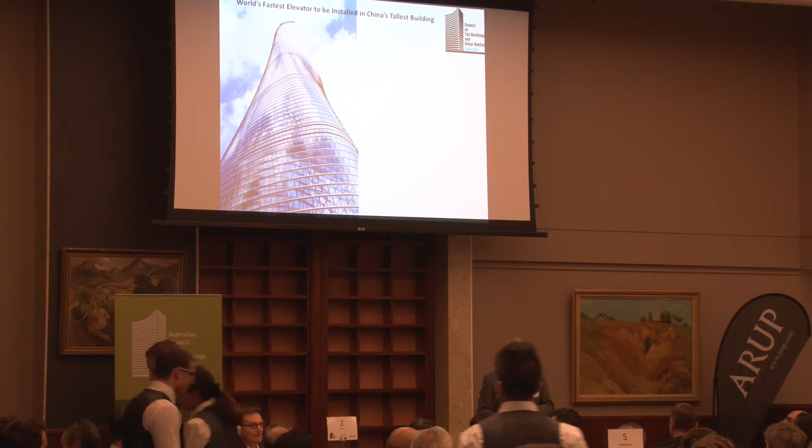They had to develop extra strong wires, they're saying here, and because of the speed and the amount of energy, it certainly generates a lot of power. So doing it as 2 lifts, they're more or less self-generating in power, the words are saying. To further increase the safety, elevators are equipped with multi-stage shock absorbers, emergency stop devices, speed governors and other safety devices. To get to that sort of speed and reduce the turbulence, it's actually got streamlining top and bottom, so it's like a little, I guess, rocket ship going up and down inside the capsule.

And it's also equipped with devices that reduce the air pressure in the car, so you don't get that feeling of discomfort like when you take off in an aircraft. But we'll see how that actually works. So the building is 632 metres tall, or 119 stories, 53 seconds from the bottom to the top and stopped again.

And if you go online and Google elevator speeds, there's a great little diagram of all the world's tallest buildings in real time, and it has a race between the elevators, and it's really interesting to see how fast this one is compared to everybody else. So it's worth having a look at.

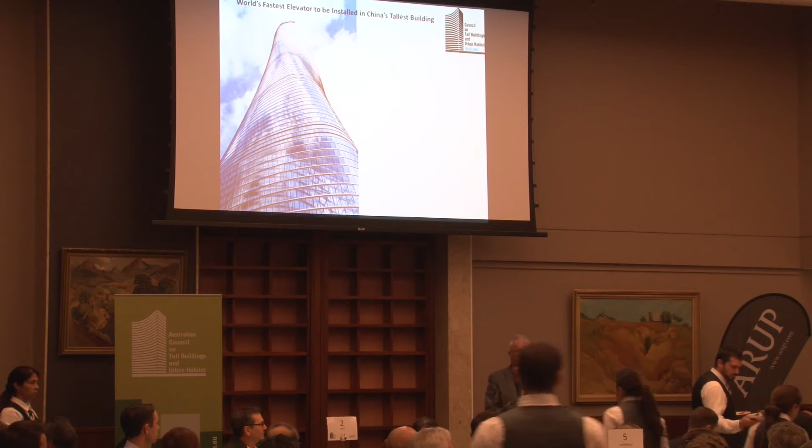So we have 2 speakers presenting first up this morning. The first person is going to be Caroline Stalker, Director from Architectus. Caroline is a highly regarded designer, communicator and leader of teams for complex architectural and urban master planning projects. Her career spans 27 years and has involved a range of projects around the globe. She demonstrates a sustained passion for enhancing people's connection to the natural world and each other through design. This has been recognised over many years through numerous architectural and planning awards and government advisory roles.

Caroline has recently been designing breathable and green integrated tower developments and is a member of the Council of Tall Buildings and Urban Habitat Design Committee. She's also an adjunct professor of the School of Design and Creative Industries at Queensland University of Technology. Caroline has served and chaired many juries in both architectural and urban design awards. Oops, I've said that before.

Caroline's presentation today is based on a presentation she did last year at the Council of Tall Buildings and Urban Habitat Conference in New York. So I'm looking forward to seeing her. I didn't get to go over last year.

And just to save time, I'll do Elizabeth's introduction as well now so we can roll through the presentations. Elizabeth Watson-Brown is the Design Director at Architectus. Prior to being appointed Design Director of Architectus Brisbane in 2011, Elizabeth Watson-Brown directed her own practice for 21 years. Highly regarded for exemplar place response and socially responsible design, Elizabeth has been in receipt of many major architectural awards.

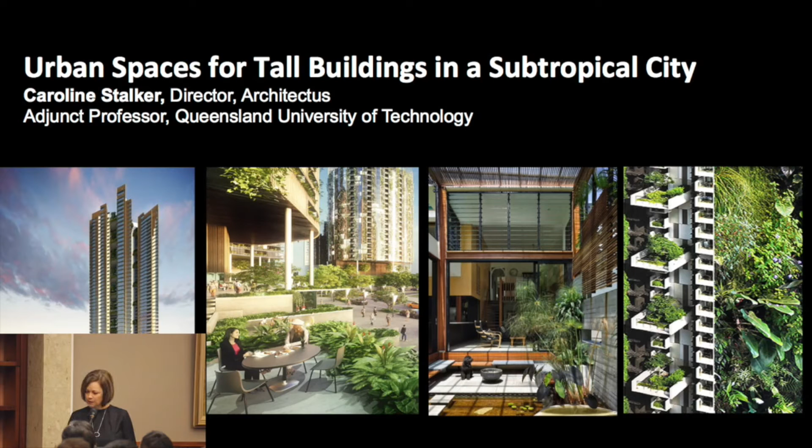So this work really comes out of an interest in engaging with this subtropical condition both locally and internationally. Many of the world's fastest growing cities are located in subtropical climatic zones in India, Vietnam, Africa, Latin America, Thailand and southern China. And as pressure to urbanise rapidly within these very condensed geographic areas is driving the creation of a very dense urban form, there's very intense pressure placed on natural systems and energy resources. The great thing about Brisbane is that we share this climate with these places, and we can be a kind of crucible for ideas and good practice for global urbanisation at higher density.

And the other great thing about Brisbane is that we have this climate and this place that actually has ideal preconditions for more sustainable development, in that the benign conditions of our environment mean we have the ability to create low energy buildings quite simply, and we have the ability to grow vegetation profusely very easily, and the right kind of rainfall and climatic conditions to create a greener urbanism and to bring green into our urbanism.

And these are, which is great, which means that we can really establish urban ecologies within our higher density environments, as well as essential nature connection. However, we are overall generally still building 20th century cities for 21st century circumstances. And if we look at the challenges of the 21st century and building cities in the 21st century, they are primarily around ecological sustainability and our huge population growth.

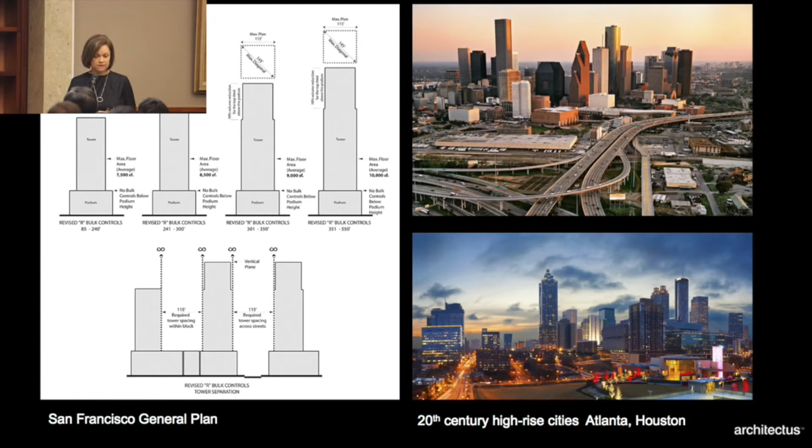And I won't talk about transport and cars and city forms, but I will talk about the fact that the podium and tower form remains the dominant solution for how we're doing high density cities around the world. It's been really interesting to be engaged with the Council of Tall Buildings and Urban Habitat over the last couple of years, because this podium and tower form is quite clearly being challenged by architects and designers and developers who want to see alternate models and more sustainable models for a more vertical urbanism around the world.

Interestingly, we may also have similar opportunities here in Brisbane. And for a city of its size, we're experiencing something of a high-rise boom. If you put it in the broader context over 20 years, maybe not this very year, but with 50 new high-rise projects projected for the city centre over the next 20 years by Brisbane City Council. The transformative impacts of these 50 towers could be enormous, and we actually mapped 50 hypothetical sites, demonstrating that in 20 years our city centre could be radically different as a consequence.

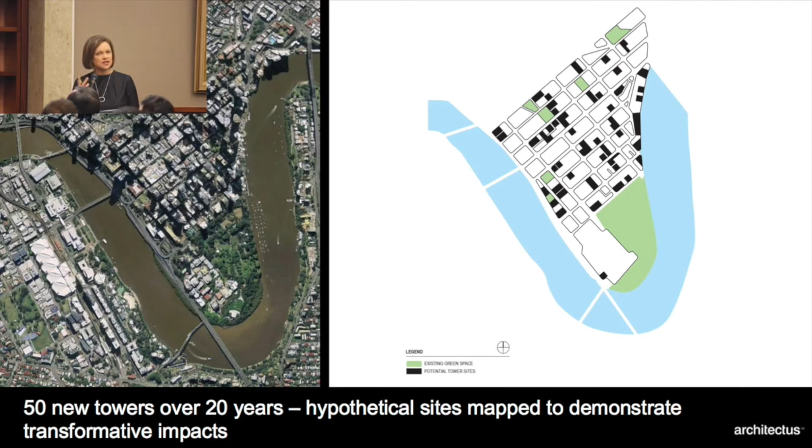There is immense opportunity inherent in this 20-year project to recast Brisbane as a city who maximises her natural climatic advantages by making a porous, green urban mesh of rooms, people, places and spaces offering landscaped respite, ecological connection and interaction, fully embracing our lovely subtropical setting. And that's really what I'm going to be talking about today, and the kinds of changes in thinking that we need to embrace to deliver that.

When the Centre for Subtropical Design was established, it undertook a really interesting community survey around southeast Queensland, asking people what are their key environmental values about living in southeast Queensland. And the two words that kept coming up again and again were openness and a relationship to landscape. That's what people love about living here. And this is what you could actually articulate as the subtropical experience.

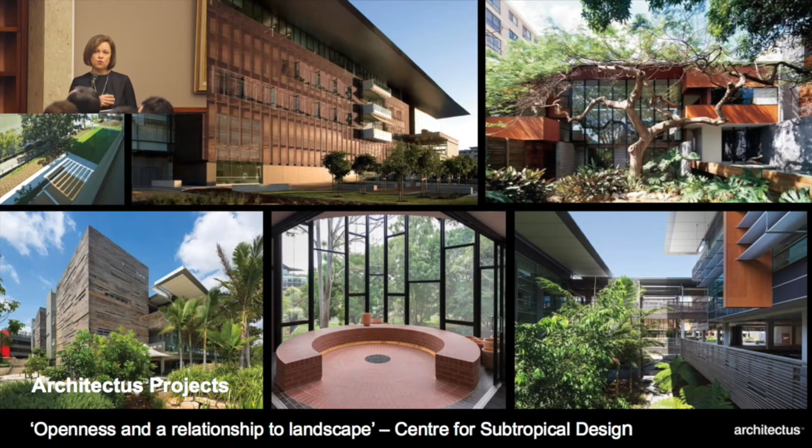And this idea of a clear openness and relationship to landscape has been a touchstone in the practice's projects for as long as I've been associated with the practice, which is 12 years. And we constantly look at ways that we can deliver that through all kinds of different project types. And I guess if you think back to where that familiar experience comes from, I don't want to get too romantic about the Queenslander because it's not perfect, but it does have some essential qualities that have really been starting to inform our thinking about the subtropical experience.

David Malouf, in his beautiful book 12 Edmondstone Street, described Queenslanders as airy, open, often with no doors between the rooms. They are on such easy terms with breezes, with the thick foliage they break into at window level, with the lives of possums and flying foxes, that living in them, barefoot for the most part, is like living in a reorganised rainforest. And that's the thing that we love about these buildings. That's not necessarily the way they look, but the experience of being in them.

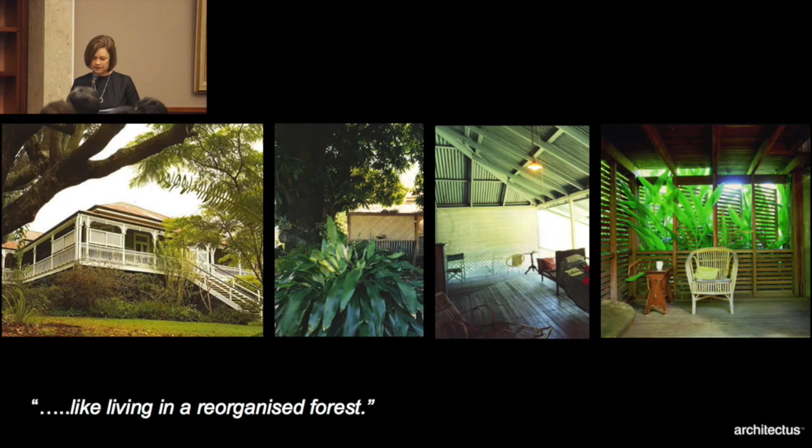They offer that capacity to moderate and fine-tune our relationship to the outside, but also give us that nature connection, and there's been so much research that demonstrates how beneficial that is to human well-being. And I guess really then can we think about how we could imagine or reinvest some of these qualities in the city centre? And certainly that's what Brisbane City Council has been talking about doing over the last few years.

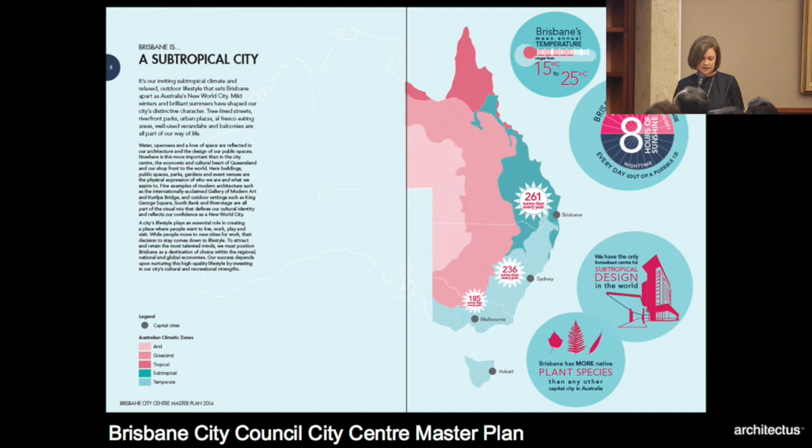And the city centre master plan has very clearly expressed the desire to reinvest attributes of the subtropical vernacular and the subtropical experience in our high-rise buildings within the city centre. And it really foreshadows this transformation of the city over the next 20 years, highlighting the need for a well-designed subtropical city.

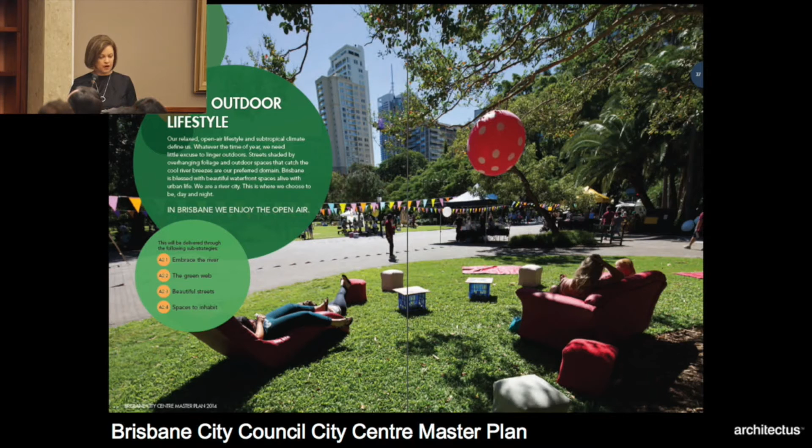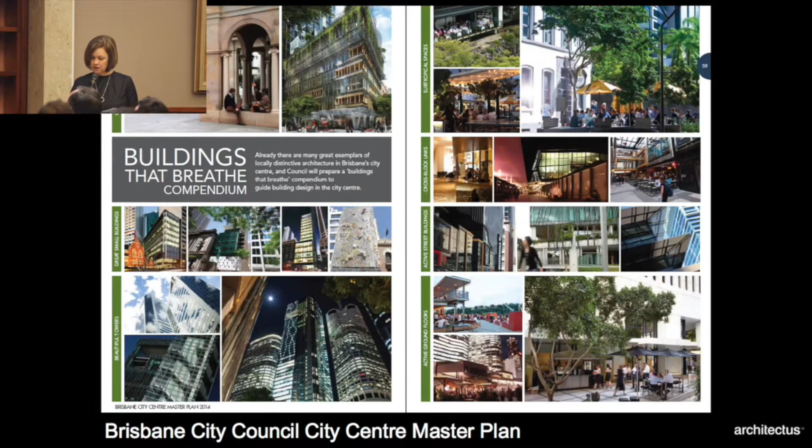It talks about ideas of leafy outdoor lifestyle for our public spaces, and importantly, the notion of buildings that breathe. And there's been some great work done on this compendium of buildings that breathe. And applying these concepts to tall buildings in Brisbane clearly has some work to be done to it, and we're looking for how this is going to play out.

I understand that the draft design guide is being finalised. It may have moved forward since then, and exemplar projects are certainly on the drawing board. But what we're seeing is the early translation of these concepts, as shown in these figures. The podium is articulated to create an urban veranda zone with recesses for gardens and shaded edges. But I'd like to point out that the fundamental form is still a podium aligning the street edge.

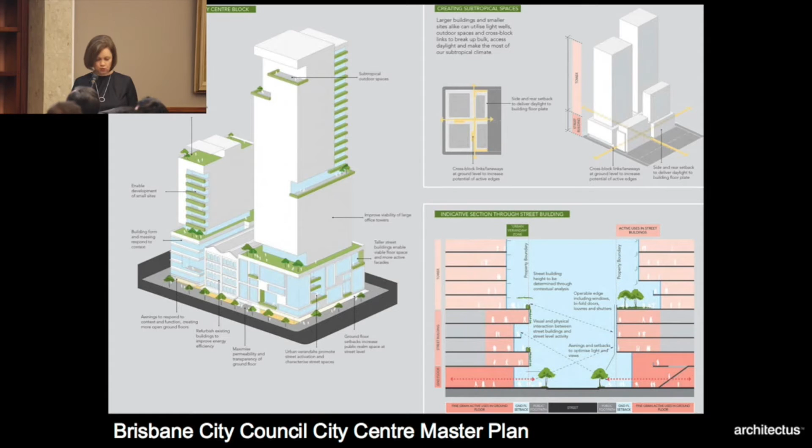And I believe that there's a fundamental issue with the adoption of the podium as a solution for moving forward. Podiums have been important devices for city planners throughout the 20th century to achieve street scale and active edges. But as we move into the 21st century with our ecological challenges, we really need to think differently about these.

In Brisbane, we have a particular condition where we have quite narrow streets. We have 21 metres between property boundaries, and that 21 metres is jam-packed with services, buses, cars, pedestrians, awnings, driveways and signage, limiting options for generous planting and water-sensitive urban design. When our city was rebuilt in the 80s and 90s, it was based on podium towers, podiums lining the street edge. And all of the activities of the public realm really crammed into this 21-metre zone between the buildings.

We do have within the city centre some generous public spaces of respite in our botanical gardens, River's Edge and Post Office Square, and they are heavily used. However, the public experience of the heart of the city centre is largely defined by these podia aligning the grid, with the public realm as the leftover spaces between.

And the enclosure of the podia at the perimeter means that these deep plan spaces can be very energy hungry as well. Our streets and buildings in the city can become urban heat islands in the summer, with the centre of the city often being the hottest part of our metropolitan region. And in Brisbane, if you watch the behaviour of Brisbaneites in the summer, we seek shade and breezes when we're outside, or we just stay in the air conditioning.

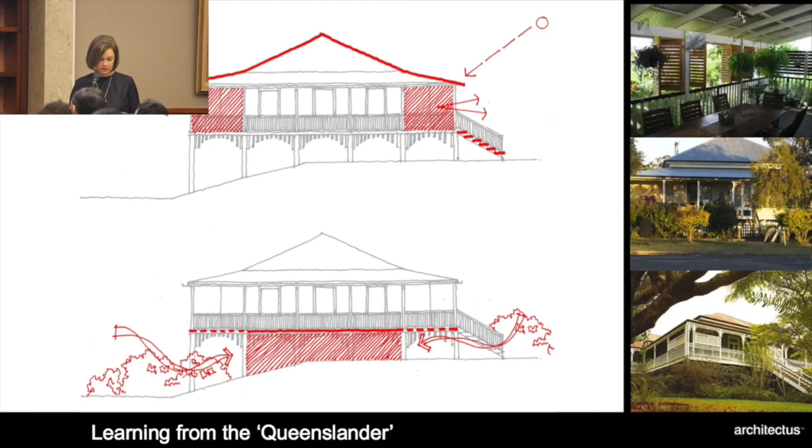and retreat spaces. And what I'm going to present now is 4 typologies or alternate typologies from podia that are around this notion of integrating subtropical experience and ecological function in the base of the building. And they're ideas that we've been trying out on projects over the years. First of all, the stepped garden terrace.

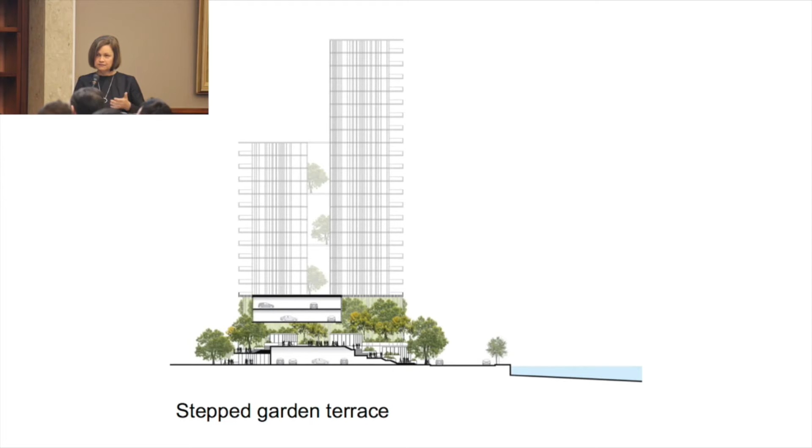The notion that a garden terrace can be created at the base of a building that can be accommodated by splitting of car parking to accommodate deep planting zones on the street, but also folding the green up onto the first level of the city is something that we've explored in a number of different projects.

In this project in the north of the city, we were really looking at the idea of creating an elevated platform that captured breezes and faced the right direction for some winter sun, but then also made a breezy entrance to the commercial uses and residential buildings above. And so that was that idea very much of a porous ground plane folding up and being able to accommodate.

Importantly, this would be an activated space, not a passive space. So there'd be retail on the street level, but also retail cascading down this terrace. And that was a first typology we've been exploring. The second typology is the notion of an urban undercroft.

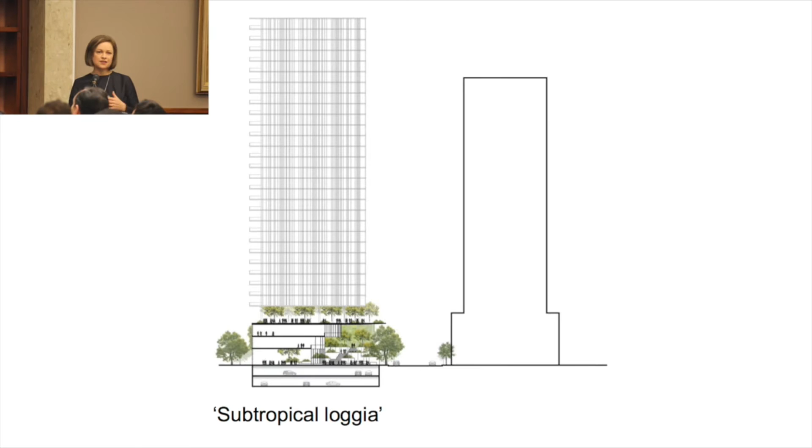Open undercroft spaces in tall buildings can provide ideal subtropical retreat spaces, offering deep shade, allowing breezes to flow through, deep planting zones around the edge, and spaces for water gardens. And exploring this typology, you can look at changing levels to create privacy. Again, you can activate this more open garden space with pods and really achieve that cool retreat within the undercroft of the tower and within an urban plaza.

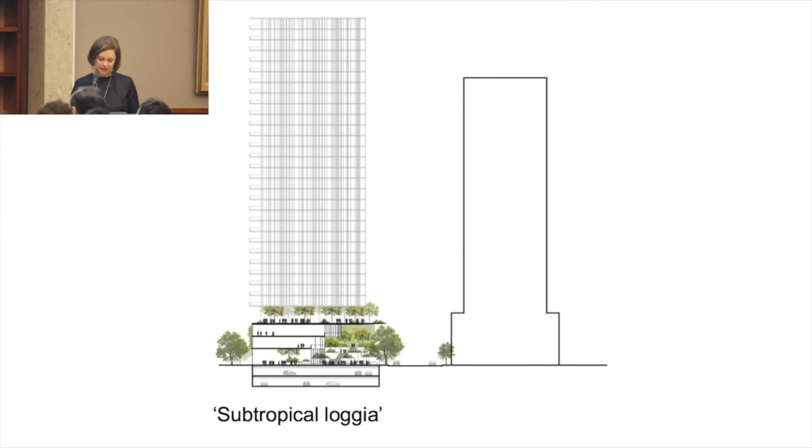The subtropical loggia was another typology that we looked at, and a loggia is a well-known Mediterranean climatic adaptation, providing shelter from hot sun and winter rains. Profound improvements to the ground plane of the experience of the city could be made with deep shaded edges, occupied edges along the street. Subtropical loggias, calibrated to accommodate trees, screening, water gardens and microclimatic adjustments that enable people in the city to find places of shelter or places in the sun.

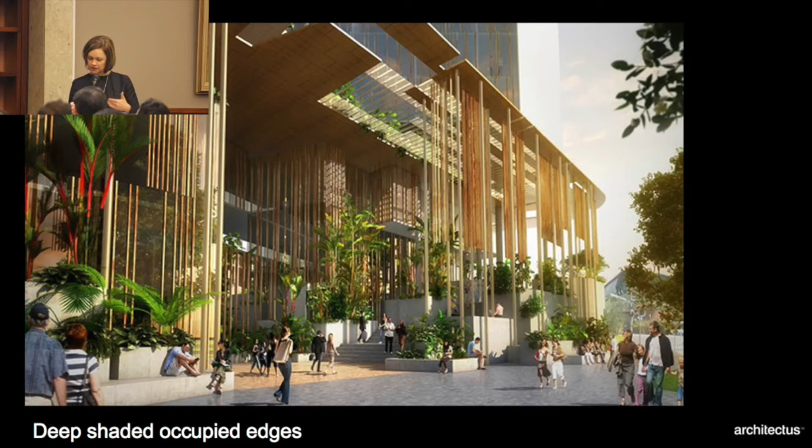And this project in the west of the city, which is a hotel and mixed-use project, enabled us to explore that idea of a subtropical loggia where the hospitality spaces could actually occupy this garden terrace, and again a fine screen to make those adjustments to your western or eastern frontage.

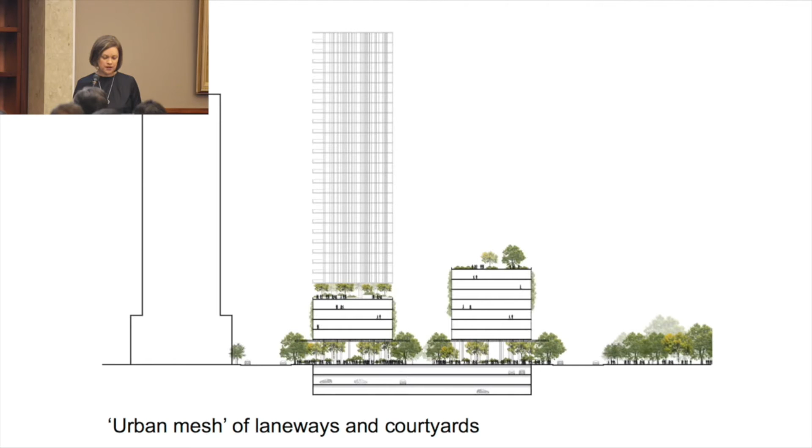And finally, the notion of an urban mesh of laneways and courtyards. So shady laneways combined with courtyards that catch winter sun could be woven into the ground plane as a mesh of subtropical spaces. A mixed-use project in the southeastern corner of the city provided the opportunity to look at a porous mesh of people spaces, both in plan and section, throughout the block: laneways, courtyards, podium gardens and sky gardens, providing a network of green, cool and open spaces throughout the entire site.

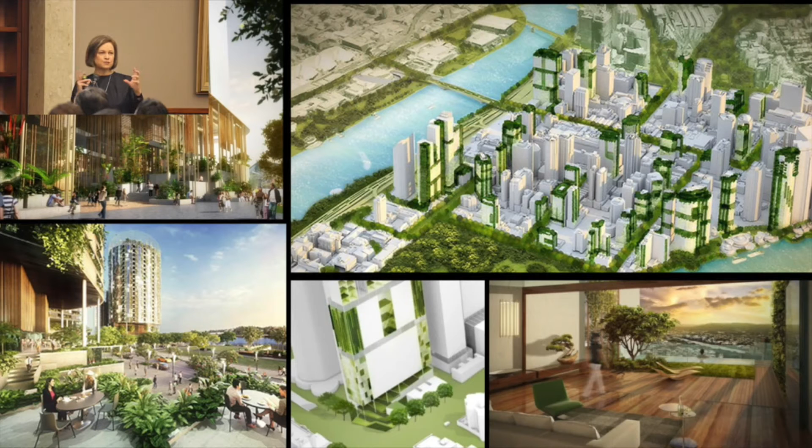So if you start to put those ideas in combination with the notion of breathable buildings and a different approach to the base of the building, you can really imagine quite a different sort of city over 20 years. It's a city that would be shaped by an urban experience of green streets, lively garden terraces, pleasant urban verandas, vibrant green undercrofts, subtropical loggias and green cool pools of air, all topped by green buildings that breathe.

This would really be a city to remember, to identify with, a subtropical city of the ecological age. And through the reconceptualisation of the base and ground plane of the 50 towers over 20 years, this could really be the urban experience of Brisbane.

So we took that idea of the 4 different podia and said, well, we could actually apply those principles to different types of sites. So the urban undercroft, for example, might be a fantastic typology for the edge of parks, so you get that connection and flow through. The stepped garden terrace, for example, might be a fantastic typology for the river edge, so you get your feet out of the flood zone, but you get that lovely elevated veranda.

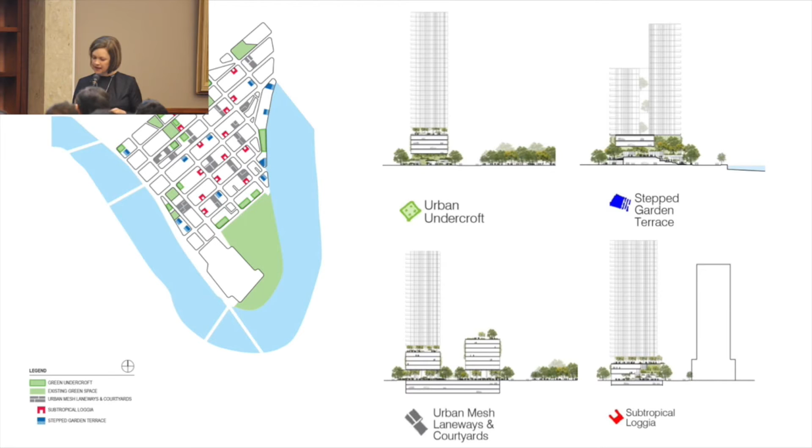The urban mesh laneways and courtyards might be a great typology, for instance, for deeper blocks, and the subtropical loggia could be a great typology for east and west orientated smaller sites within the city, so that you get that ability to screen those building-based spaces from the sun. And so that little diagram on the left shows how we hypothetically mapped where those different typologies could occur.

So to be really clear, it's not envisaged that the spaces in the bases of these buildings are publicly owned or managed. They are the spaces of the commerce of the city, the retail spaces, the dining terraces, the circulation spaces, foyer arrival spaces, all the spaces at the base of a building that have commercial value. The difference is they're conceived as being open, not enclosed, inviting patronage, and that is the great luxury that we have in this climate, to make spaces like that and to bring a habitat into those spaces.

Flexibility in thinking is important. The insistence that a street must be made up of a line of glazing along the property boundary is an idea that has its foundation, I would argue, in 20th century urbanism. But in the ecological age, activation can be provided in the way that retail is integrated into gardens, in the way people move through spaces, in how they're lit and managed. It doesn't necessarily have to be through that simple architectural solution.

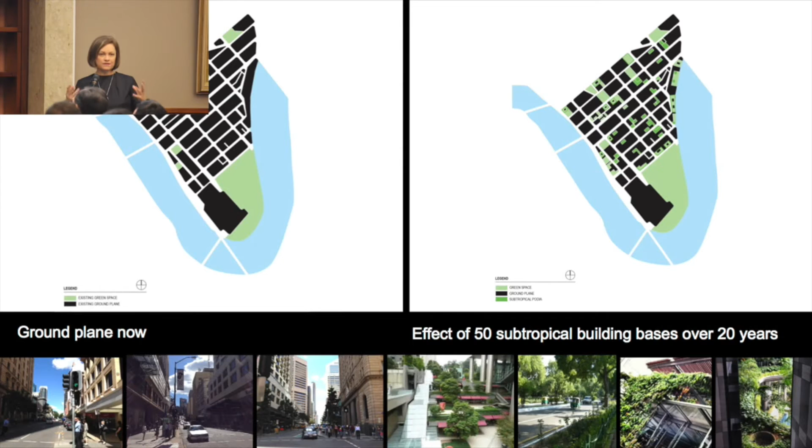I guess, pulling all of this together shows that we clearly think that urban and public spaces need to be the particular focus of big ideas about making a subtropical city. This is the part of tall buildings that most people experience, where the really big urban impacts are felt. There are huge opportunities presented by our very benign climatic conditions to create these new models and typologies. Moving towards such an aspiration really requires strong vision and practical measures to achieve it. In Brisbane, the vision is clearly articulated in the City Centre Master Plan.

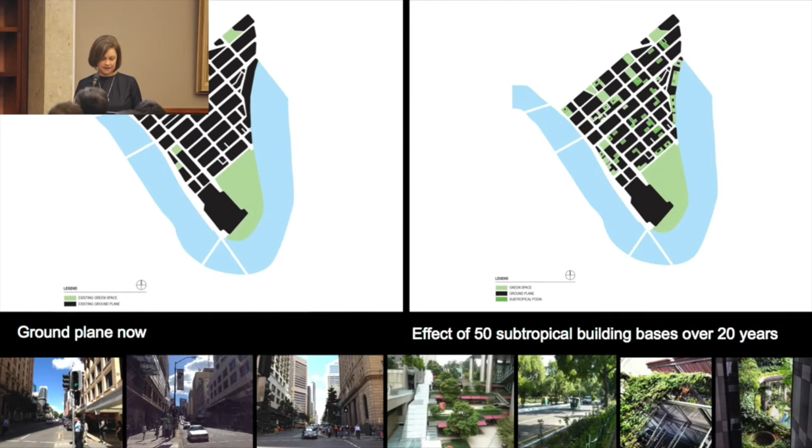The practical delivery of this will be through a partnership approach with progressive developers who understand the commercial returns in making places that people love to be. Successful places attract people, which is fantastic for long-term value and patronage. And so I'm really incredibly proud as a Director of Architectus to be able to introduce this project, which is an absolutely extraordinary exemplar of the kinds of principles that we've been talking about and thinking about, and potentially Brisbane's first breathable building. So I'd like to invite Elizabeth Watson-Brown to the stage to talk about this project.

Great, thanks so much, Caro. Can everyone hear me?

You've certainly set the scene, Caro, and explained the global context and the local context in which we sit, and our vision, I suppose, for what we like to call the new subtropical city, the new world subtropical city. And you can see, after listening to Caro, how interested we are in the urban habitat element of the CTBUH initiatives. But as Caro said, as we build our city for the ecological age, we can see great opportunity in Brisbane city centre, as Carolyn outlined, to open up the ground plane, to create shade and to allow the permeation of breezes, greenery and, importantly, people. Not just buildings that breathe, but in fact a city that breathes.

So in reference to the TB aspect of the CTBUH, I'm going to talk this morning about the proposed project at 443 Queen Street, which does sit in that wider context of the vision for the subtropical city, and in the broader context, as Caro explained, of great global possibilities and a future in the subtropical zone. And I won't dwell too much on this because Caro talked a little bit about this, but we certainly in our design always start with the best aspects of the subtropical city. And to do that, we do need a real understanding of the subtropical condition.

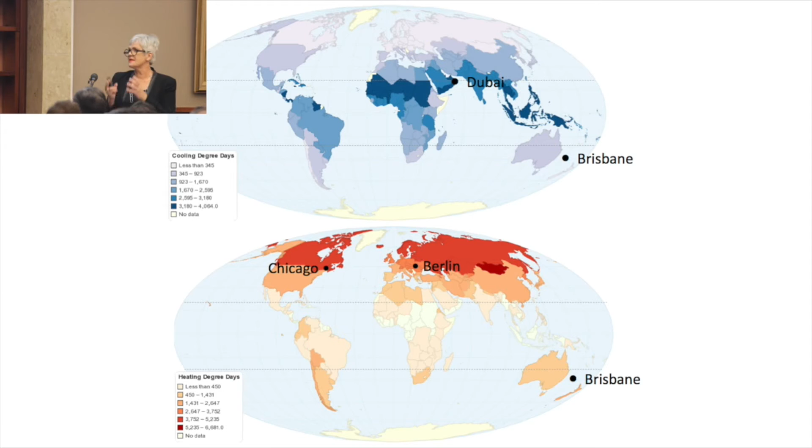So it's not just about individual buildings in our place, it's actually about the influence they might have in terms of the development of the planet. And in global terms, about 1/3 of people actually live in the cold to cool temperate zones. You can see that on the bottom map, and depend on heating in winter. 1/4 live in the hot, humid equatorial zone, and another quarter live in the hot, arid zones where cooling is desirable for a substantial part of the year.

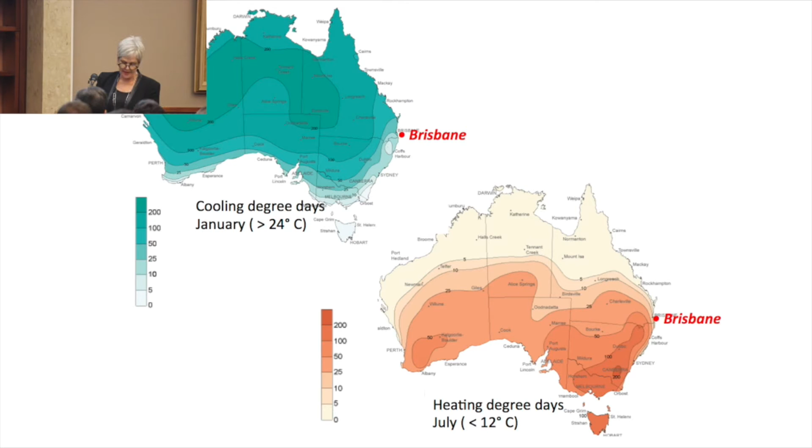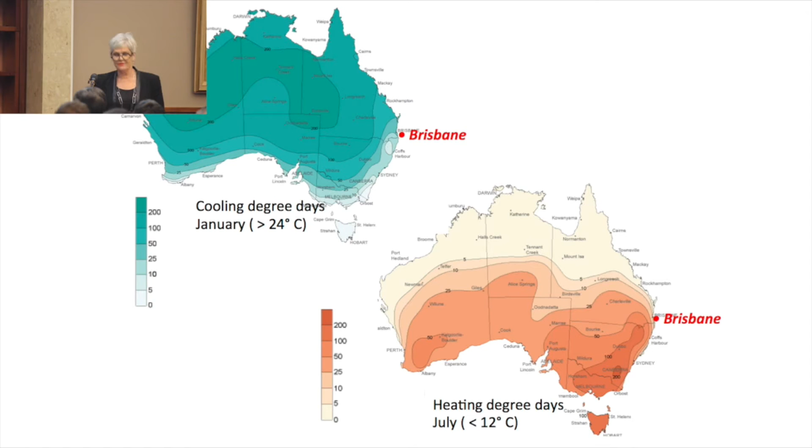But we, in Australia, our whole continent is located largely outside these extremes of temperature. So we've got a very, very particular and special condition here that we need to take advantage of. And we like to say that Brisbane's different. And looking in greater detail at Australia, the Bureau of Meteorology actually agrees with that. Sort of like Goldilocks porridge, we're not too hot, we're not too cold, we're just right. In time with climate change, Goldilocks might need to move a little bit further south, but for the moment she's quite happy and comfortable here.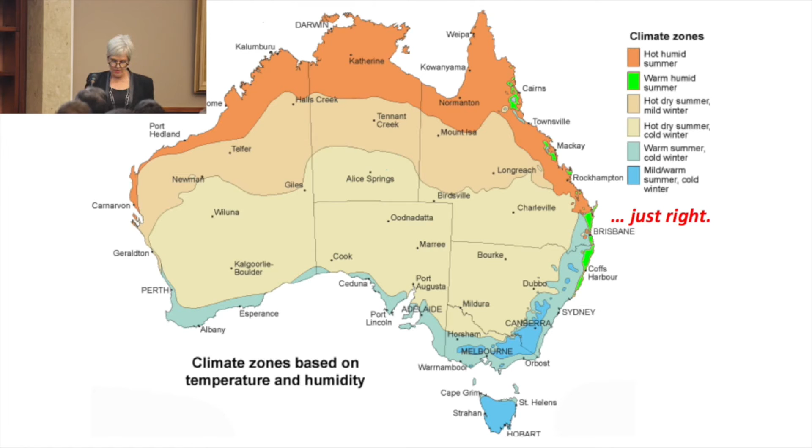So in the much finer grain analysis by BOM, it shows that our particular balance of temperature and humidity is localised to very sweet spots: the Australian mid-east coast and the highland areas of our tropical hinterland, and we're there in the centre of that sweet spot. So looking at the global scale, and Caroline spoke about this, we find the environmental conditions we enjoy are shared with east coast regions on 5 continents, which is very interesting. We're fortunate that 1/6 of the world's population also lives in this warm subtropical zone, and that's the place of many burgeoning cities and growth regions of Brazil, northeast India and southeast China, as Caroline mentions. So this provides the sort of larger context for how we think about our project in Brisbane.

So I'm going to be presenting the Queen Street project. I've framed this talk about the project around the structure of the Brisbane City Centre's important Buildings That Breathe initiative that Caroline spoke about. And we're certainly really happy that this advocacy of breathing architecture, which is the culmination of much thought and collective endeavour by a lot of individuals in this room over the years, it's very heartening to see it now embedded in policy, and this is a major step change and major positive move in terms of the future of the city. This is a great response to the context we've just described, and we believe, if properly interpreted, it could lead to a new generation of design for subtropical living, and certainly a new vision for Brisbane, as Caroline described so well.

So place is definitely the key to the way we think about architecture, and like many design professionals in this room, I've spent a lot of time thinking about Brisbane as a place, its landscape, its architecture and the way we live. And the way we think about designing in this space, Brisbane itself is the inspiration. So CBUS Property Development Manager Michelle Fitzgerald, who's here this morning, is an architect with a deep knowledge, experience and commitment to the architecture of this city.

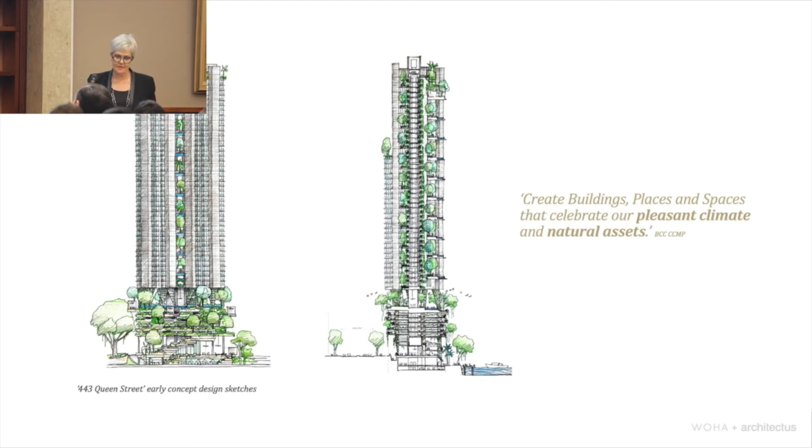So significantly elevating the parking, we could create that very generous public realm, the sort of area that Caroline was talking about. The resulting form actually generates a public realm, in this case, an area equal to 76% of the site area, which is very rare. The area of landscape space is close to twice that of the site area in the building, and the community spaces on the site are equal to nearly twice the area of the site.

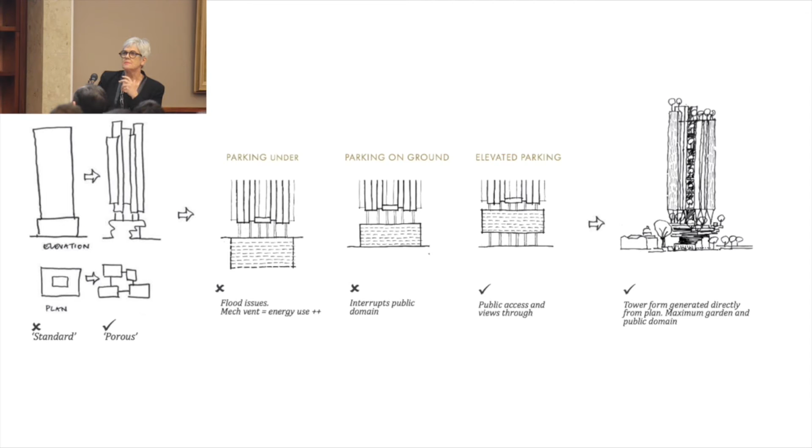So these are all really radical moves, we feel, but we do think it sets a kind of a benchmark for discussion about how you actually make generous subtropical spaces in our city.

Compared to a more compact plan form, an example of which is shown on the left of how you might approach doing a building on this particular site, we were able to pursue full natural cross-ventilation to every single apartment. Again, we think this is a really critical thing to try and achieve. It's not always an easy thing to achieve. It was certainly something right from this very early concept stage that we were very, very passionate about pursuing and achieving.

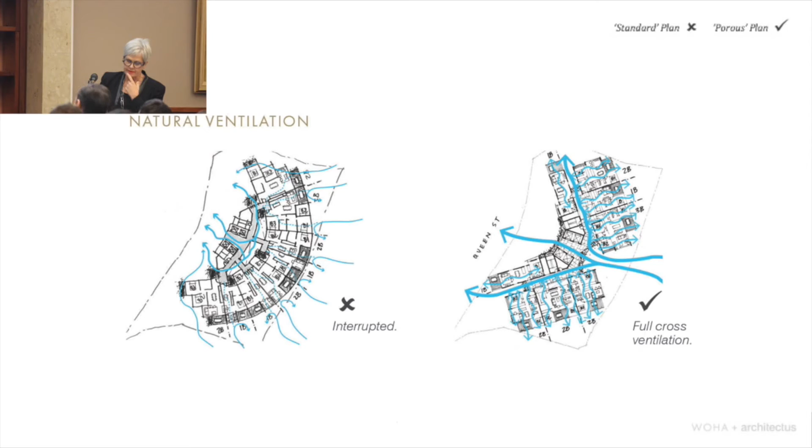By opening out the plans, and you can see the plan comparisons here between a more standard floor plate and a porous and open floor plate, we could also pursue a much wider and more dramatic arc of view from each apartment in this apartment building.

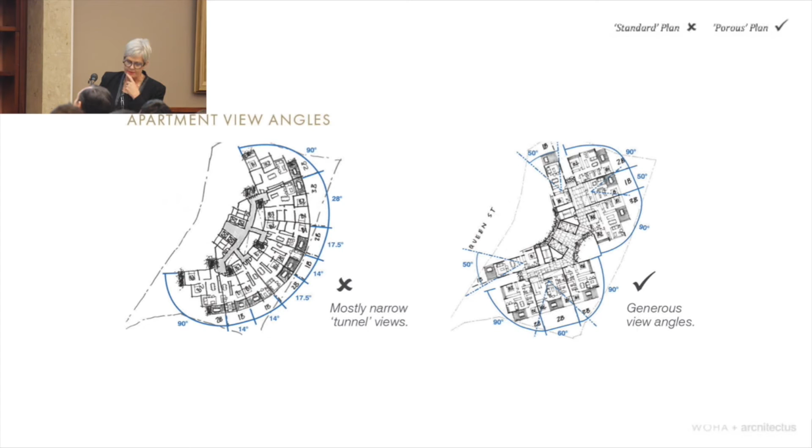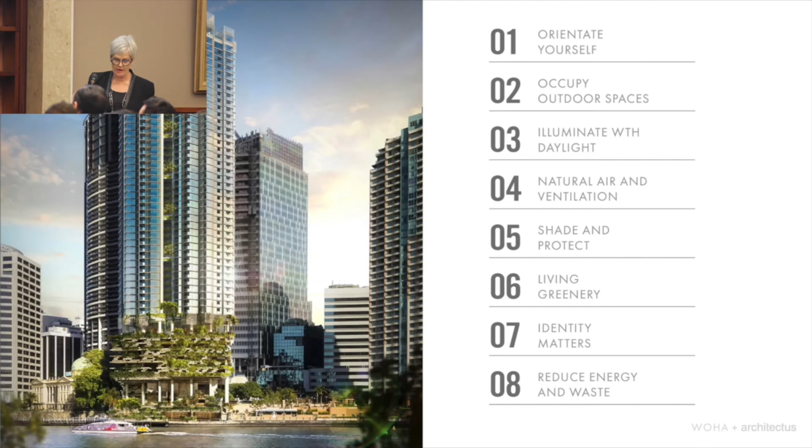So as I said, I'm going to explain the project in terms of each of the 8 buildings that breathe elements set out in the Brisbane City Centre Master Plan, not just because they're now formalised there, but because we actually hold them dear. They're principles at the very core of the design values of both Architectus and obviously WOHA. So orientate yourself. This is a marvellous site, obviously. The position of it is phenomenal.

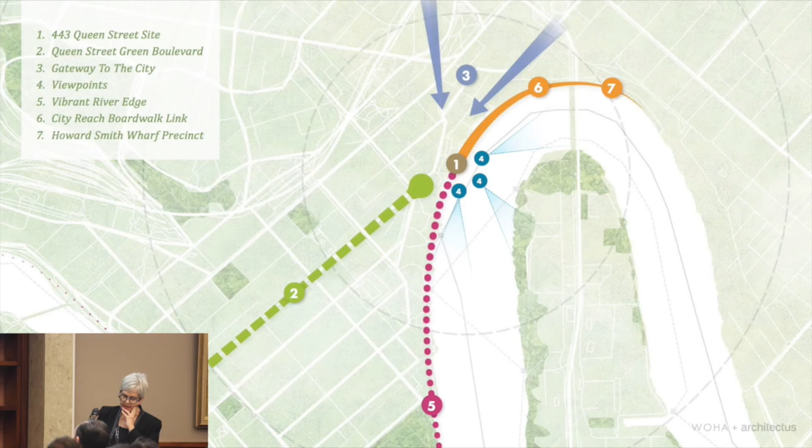So in the context of this project, we believe we've helped to orientate the building and its users and the public and the city on this remarkable site, and we believe that this has the potential also to orientate the city itself. It's on this key site on the banks of the Brisbane River with all sorts of amazing connections. It almost acts as a gateway, a landmark entry to the CBD from the valley, and it's a great vantage and connection point for the city.

It is an important location at the nexus of the city streets and the river edge, a vantage point, as I said, for some of the most powerful symbols of the city: the river, the Story Bridge, Customs House and its fig tree, Kangaroo Point cliffs. It is visible, potentially, connected, potentially, and open, potentially.

So the design that we've come up with is organised to clearly place us where we are at on that site, both physically, culturally and historically. And we think that this precinct links that earlier colonial city to the aspiring New World city of today.

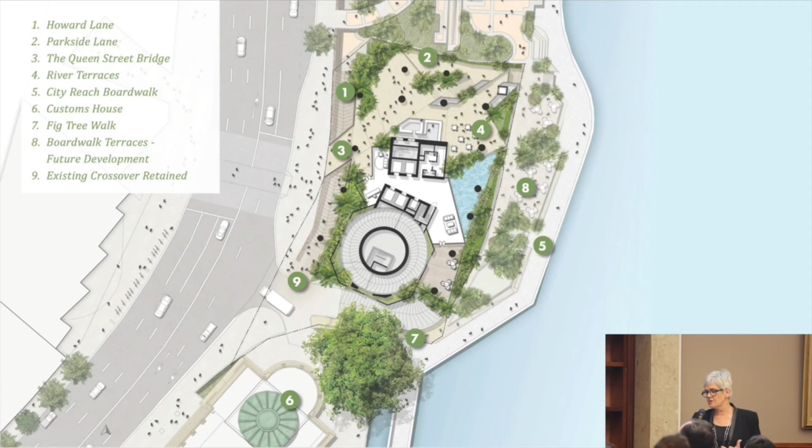An extremely tight entry lobby is the only sort of private space, if you like, and that's shown in white on that plan, the lobby and the core. And the rest of the space on that ground level and that Queen Street level is absolutely accessible public open space and garden space, placed as it is on that site to maximise the views to the river and to the Story Bridge and access from the city to the river. So we see this proposal as a link rather than a barrier between the city and the river.

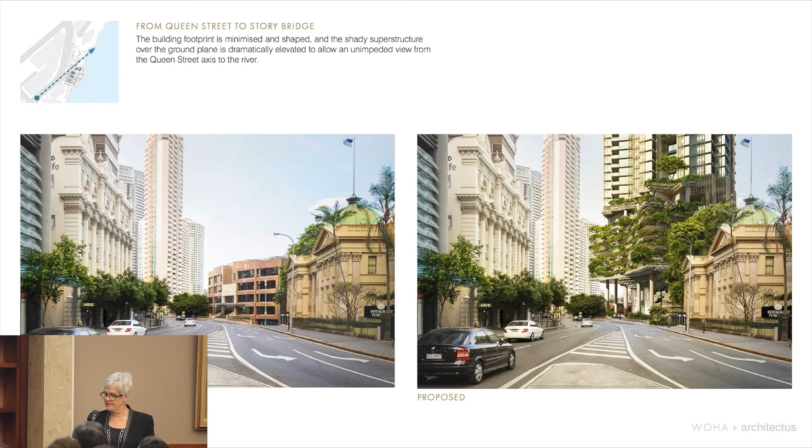And so just to illustrate that, we undertook a series of studies contrasting our project with the current impacts of the existing building on the site, the colonial building. And we certainly believe that this proposal offers a far more open, accessible and indeed orientating public realm than exists at present. So you can see existing conditions on the left and the proposal on the right from various vantage points, and these were critical vantage points as well in terms of the city centre master plan.

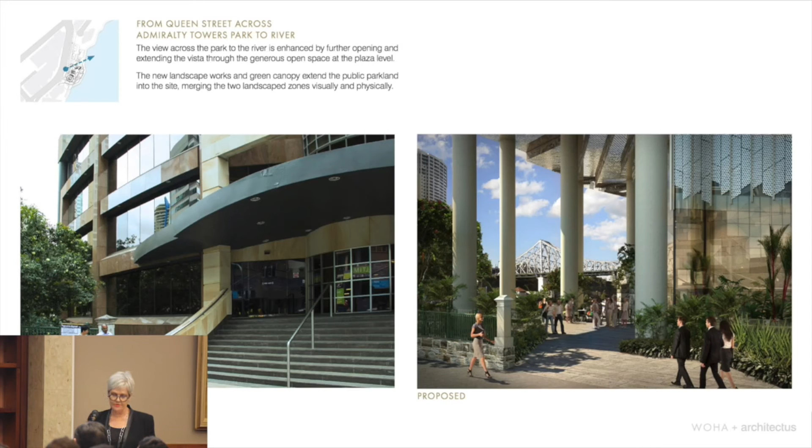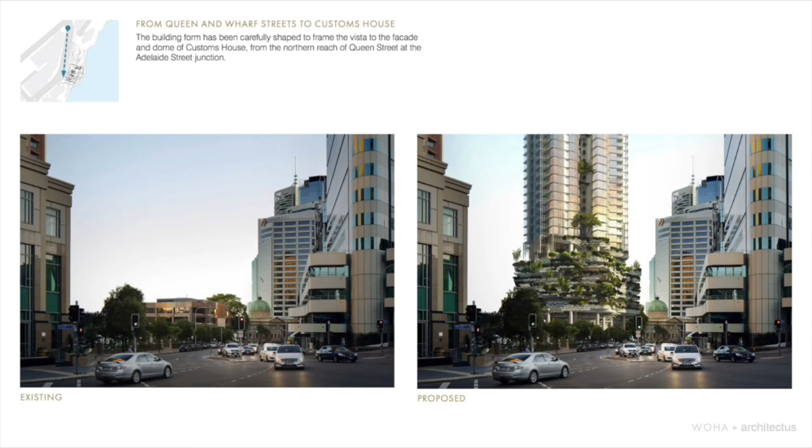So there's the footpath pedestrian experience existing on the left and the new building on the right, which is really not building at that level. We see it as parkland and public space with that transcendent view to the bridge there. View from across the road, down the Fig Tree Walk to the river. The view from the other end of Queen Street towards the site. Frontage onto Admiralty Towers Park and from Kangaroo Point.

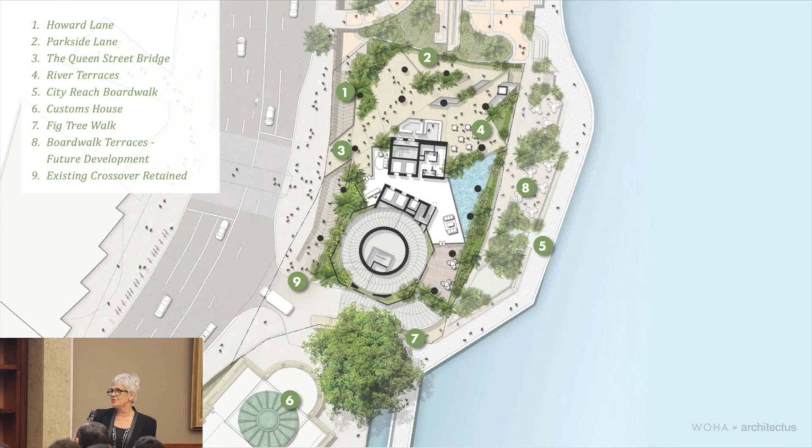So in terms of occupying outdoor spaces, again, that plan, with our ideal climatic conditions, we think this site offers the ideal opportunity to develop a really vibrant and generously connected public realm. A landscaped canopy hangs above an urban veranda, if you like, and Caroline explained the beneficence of that beautiful condition of living on a veranda somewhere, that condition somewhere between inside and outside, which is such a beautiful condition to enjoy in Queensland, and also that condition of under the house, that mysterious underworld, if you like, that's so shady and cool and breezy.

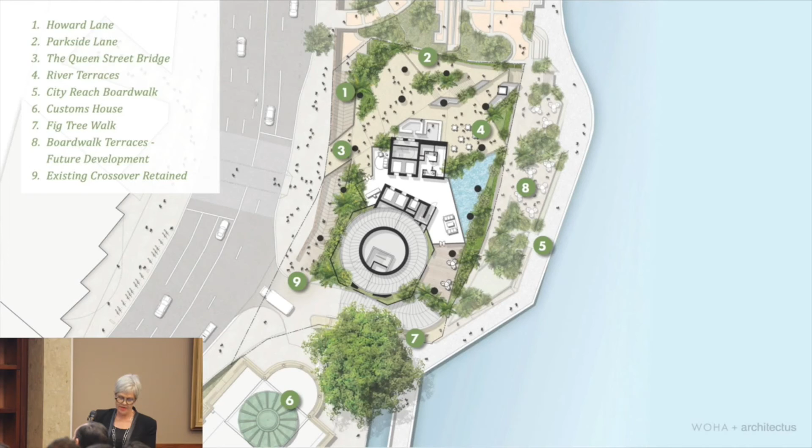So here you can see really generous new public walkways, gathering places, viewing places and active places, achieved by, as I said, minimising that footprint of the building at the Queen Street level and raising and shaping the superstructure to absolutely maximise those views and generate a lot of shade. We think the new development's going to vitalise that whole precinct by increasing the activity in Admiralty Towers Park and the Riverside Boardwalk, and Howard Lane beside the historic stone wall.

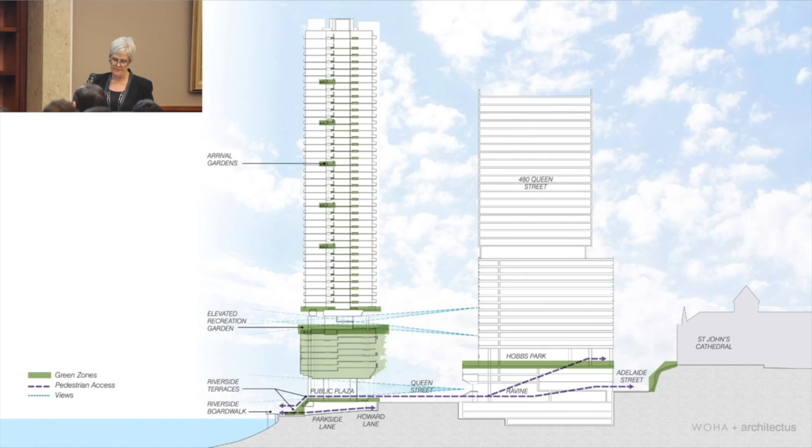We think it also sets up quite a strong relationship with the 480 Queen Street building opposite, completing that connection set up through that site from St John's Cathedral to the Riverside. So we think that it's all about actually being dignified and respectful in its context and opening up the city to the river. That's what we see as the purpose of this site and this development.

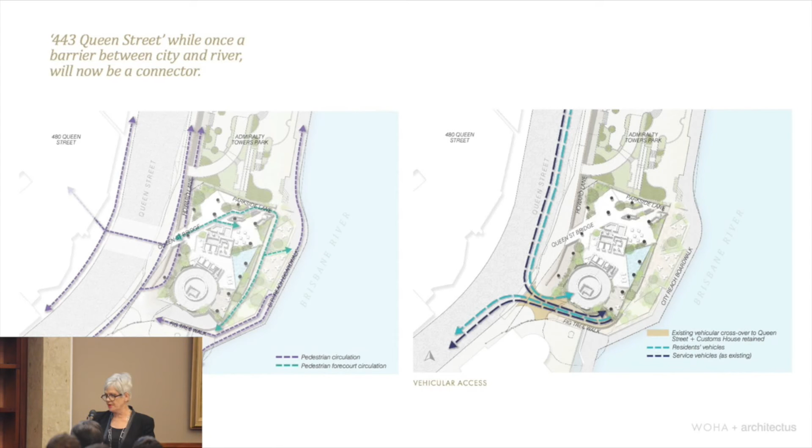Car access is absolutely restricted to the existing service lane and the crossover. This ensures absolutely minimal disturbance again to the streetscape, historic structures and the tree. And again, minimising the footprint of the vehicles liberates the remainder of the site for safe pedestrian usage and linkages to the park, boardwalk and the lane. So all of those principles that Caroline outlined, we're enacting here. And again, a quote from the Brisbane City Centre Master Plan in this precinct and this building, which is a tower in a plaza.

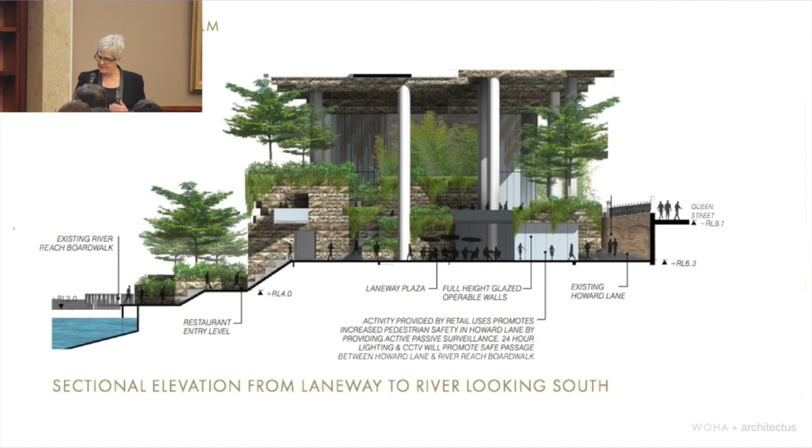In terms of activating the public realm, again, there will be a lot of public park space and cafes and restaurants fronting the boardwalk, positively activating that area, and cafes fronting onto the existing laneway, which is, at the moment, I think you'll all agree if you've ever been there, quite a scary and dead space. So we think, again, giving back to the public realm in terms of creating wonderful places to be, but activating it and creating the possibilities of great surveillance and connection as well.

The third element, illuminate with daylight. The porous plan you can see here, and response to the aspect, facilitates the permeation of natural light throughout and shading from the sun where needed. The tower is divided, as you can see on that plan there, into 4 main vertical clusters, joined only at the centre by the circulation linkways and gardens. This has proven a little bit of a challenge to Arup, but they've got it sorted now. Again, it's a non-standard building, isn't it?

You know, it's sort of, you haven't got the standard kind of very heavy floor plate. We've got this openness, and it's been a structural challenge, but very, very well solved by Arup. But really critical from the point of view of achieving, as you can see on that plan, every single apartment with access to light, air and amazing views. So that's what's generated the floor plan.

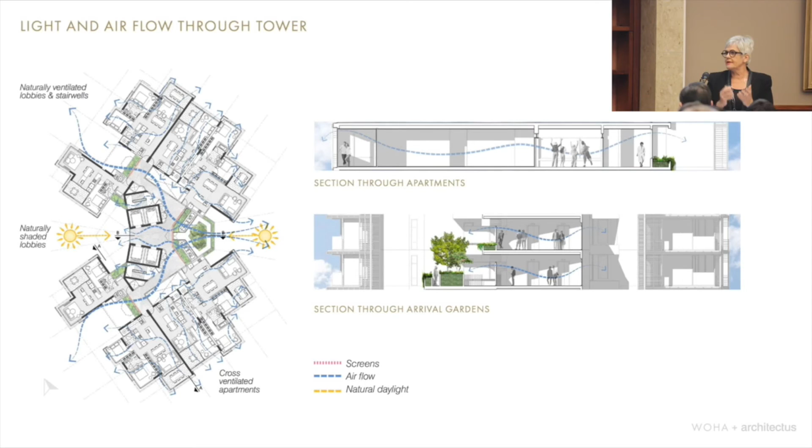And one of the things I really love about this, and it's a kind of an abstract notion, but for me it relates it back to the Queenslander, is the physical expression of the building, and the form is the direct expression of the way the plan operates and the way you occupy the building. So it's not about gratuitous and decorative shaping, and form making and strange colours and things. It's an absolutely direct expression of the function of the building, and that's what's interesting and great about it. And in my mind, that connects it back to the frugality and the honesty and modesty of the Queensland House.

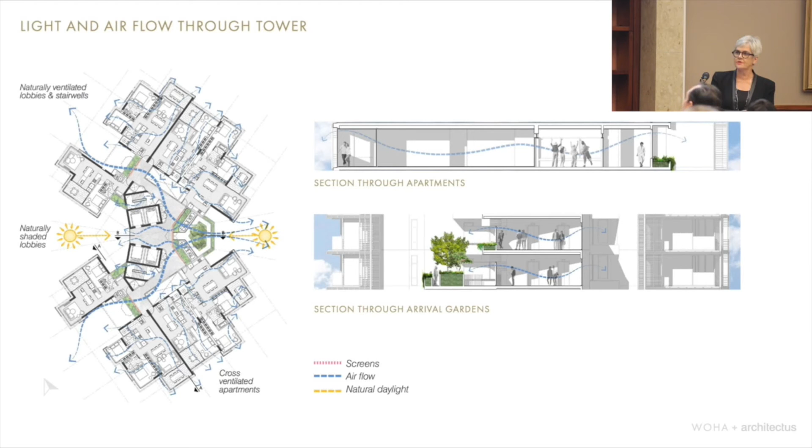So you can see there the images of the light and air flowing through, and then how that results in these remarkable living environments with these transcendent views to the river. And this remarkable luxury, and I was talking the other day to some consultant friends of ours and saying, this is what we think is the new luxury. Here, we think luxury is about access to this beautiful climate, about being able to open your windows and let the air flow through. It's not about gold taps.

It's not about marble. It's actually about giving everyone the opportunity, even if they're living in a dense urban environment in the centre of the city, to take advantage of and enjoy our beautiful climate and our beautiful vegetation. That to us is the new luxury. And that's what we think we should be pursuing in Brisbane, because we've got the opportunity to do it.

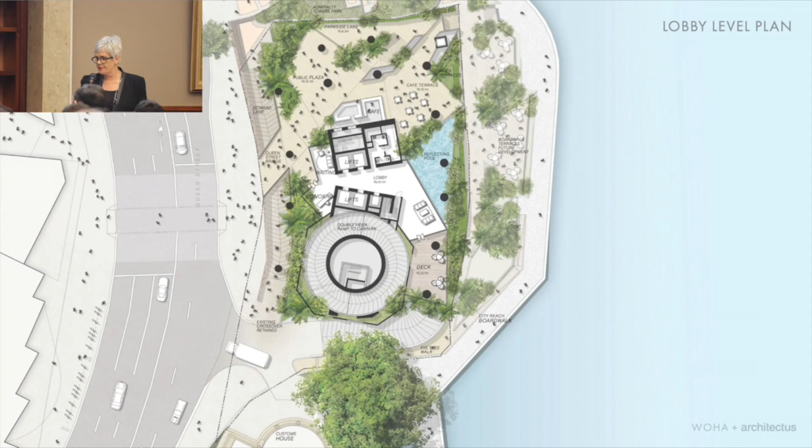Again, just talking about the fourth element, natural air and ventilation. I'm going to quickly run through the plans from the ground up to illustrate that, and that also illustrates the next couple of elements, shade and protection. Ground plan, again, obviously incredibly open, but also protected when necessary. The car park levels, radically elevated above the ground plane to create that beautiful canopy underneath. Again, totally naturally ventilated and daylit. The benefits of that are enormous, obviously.

You know, it seems nuts to us, the idea of digging a basement car park, particularly on this riverside site, throwing all those dollars into that hole, if you like, then having to mechanically light and ventilate that 24/7. That seemed like a ridiculous notion. So again, why not take advantage of these remarkable climatic conditions that we have, elevate the car park levels, and there are 6 levels of car park, and naturally light and ventilate them, thereby radically saving energy over time and make it a much more pleasant experience driving your car up there, parking, looking out at the river, seeing the planted gardens in front of you.

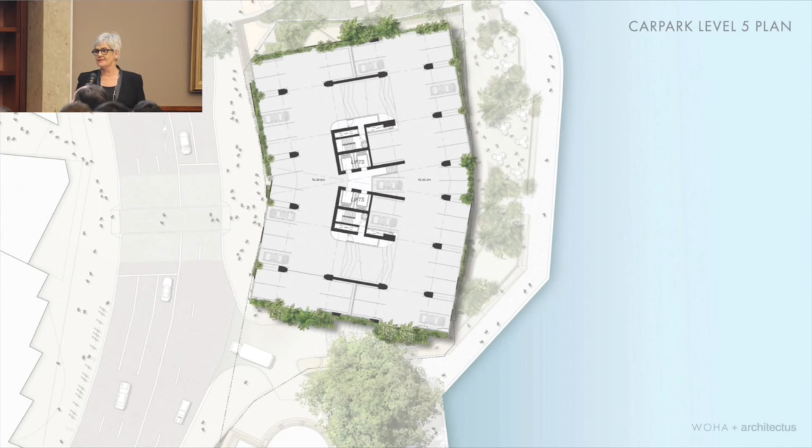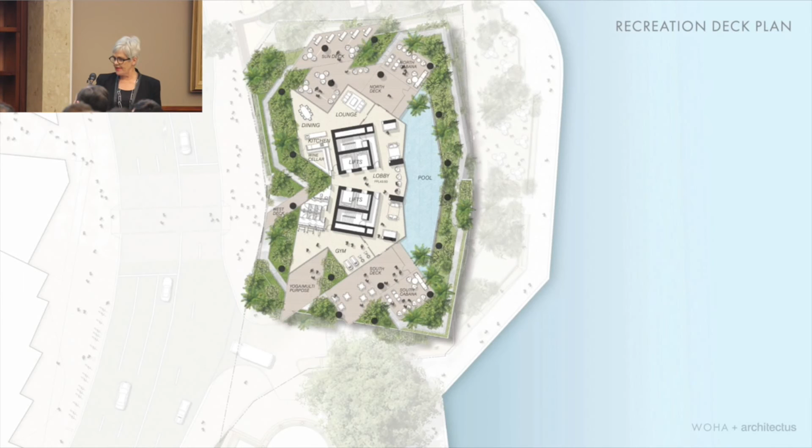So much nicer than burying yourself down in a sort of a shallow grave, with the risk of the river flowing into it, and we all know that that's happened, and people have lived through that. So that just seemed like a no-brainer again. On the lid of that subtropical hanging garden, if you like, is the recreation deck. It takes the form of these decks and pools. Again, all sorts of familiar things that we like inhabiting in Queensland, beautiful cabanas, the pool edges, but all in a very lush garden setting, but up there in the subtropical air.

And then up to the apartments themselves. So this is the first level of apartments, sort of a transfer level. So we needed a larger slab area there for the transfer purpose. So what we've done is planted that out with beautiful gardens as well.

So just imagine coming up in the lift into the arrival gardens there between those two lift cores, with these amazing views across greenery and past trees to the river on one side and down Queen Street to the city on the other, with natural breeze flowing around you. We think that's a pretty amazing experience. It's the kind of thing that we really enjoy, you know, living in Brisbane, and we think we can replicate that in the high-rise conditions.

So I've only got 5 left, so I'll move pretty quickly through these because these are pretty self-explanatory. Just when we get to a reasonably typical floor plan, though, you can see the advantage.

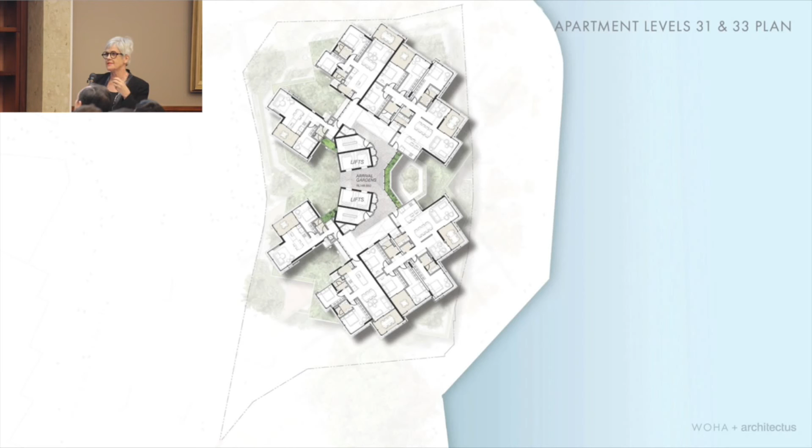And there are some amalgamated apartments on this one, but every single apartment has 2, 3 or 4 open sides, so you can open your windows. Natural cross ventilation flows through. It's probably pretty hard to read on these plans, but another great move is that each house in the sky has its own service balcony. So again, another aspect of luxury that isn't about gold taps and marble. It's about being able to hang your washing out and for it to be naturally dried.

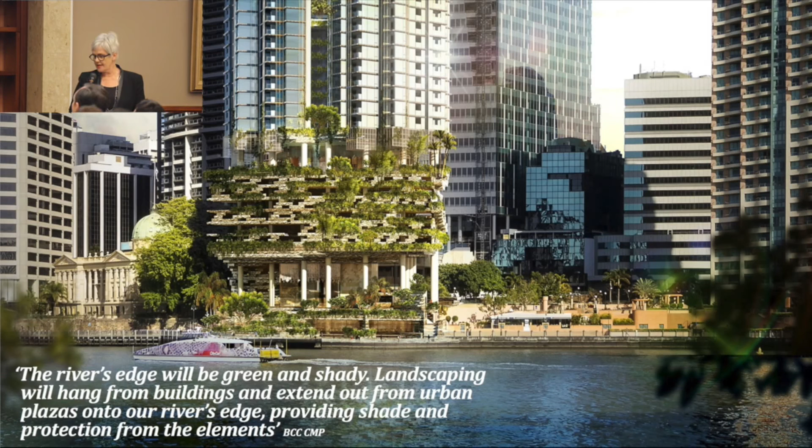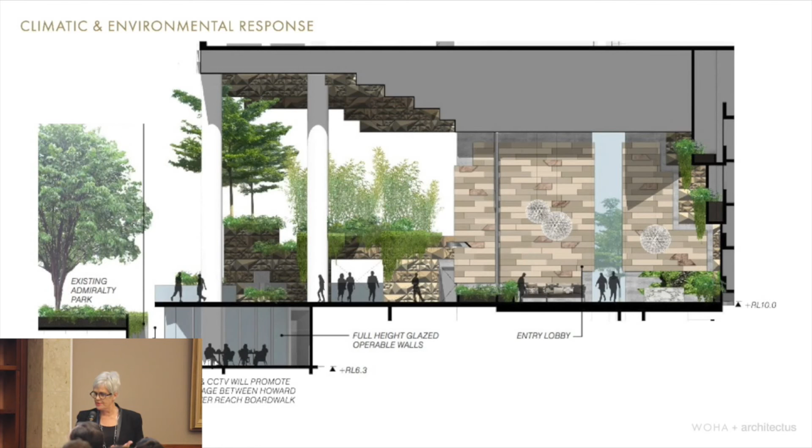So all of those things are the things that we think are great ways to live in Brisbane in beautiful housing, replicating it here to give people the opportunity to live in the subtropical air in the city in that way. So that's how we think of our building, again, taking that quote from the Brisbane City Centre Master Plan. Again, explaining the benignity of having that beautiful open public plaza at the ground level. Using screens tempered in different ways around the different faces of the building to provide shade and privacy throughout as well.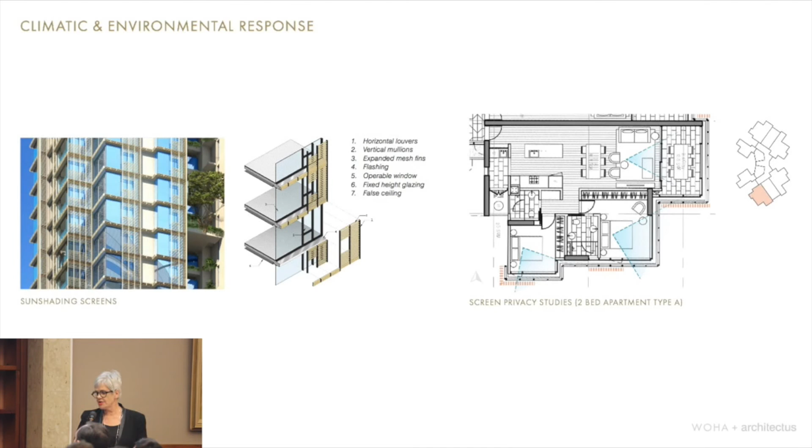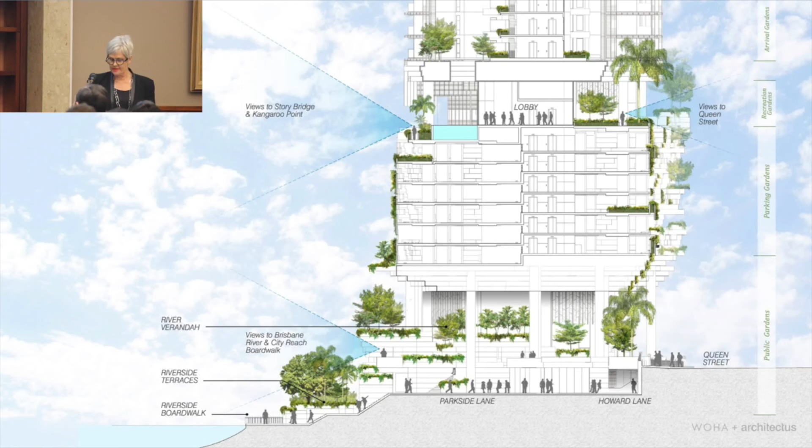Living greenery, again, we've spoken about it a lot, but we think landscape's not just an attractive feature, so it's not just an aesthetic thing. It's a dynamic, active component of a sustainable building. Planting obviously converts carbon dioxide to oxygen and sequesters carbon from the air. Plants cool the environment. They also provide food and shelter and habitat. So this is the UH dimension of the CTBUH. So humans inhabiting the city with wildlife as well, insects and animals within the city, increasing biodiversity and reducing the ecological footprint of the city.

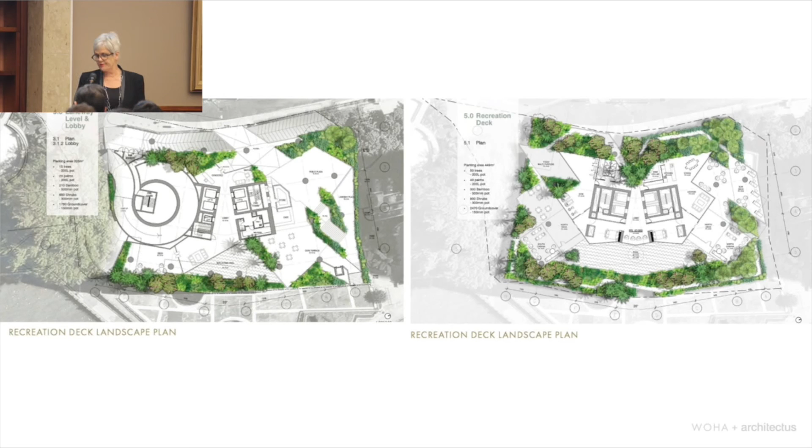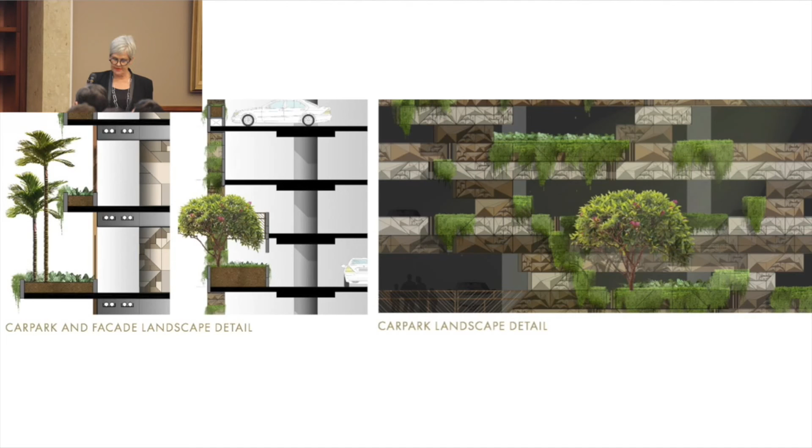And this particular project achieves a green plot ratio, that's the planted area divided by the site area, of nearly 200%. That's interesting when you compare it to the existing building on the site, with a 5% green plot ratio. And here you see some of TCL's landscape plans. And again, just some sections of how those planters actually work and the philosophy of the planter boxes and these elevated garden beds. They're all located in easily accessible common areas only, where they'll be seen, they'll be valued and regularly maintained. And all of this elevated planting is grown in very simple water-efficient planter boxes designed for easy access. Some images there of some of the details around the open lobbies and garden spaces, etc., and how we achieve views and wind protection where necessary in Brisbane.

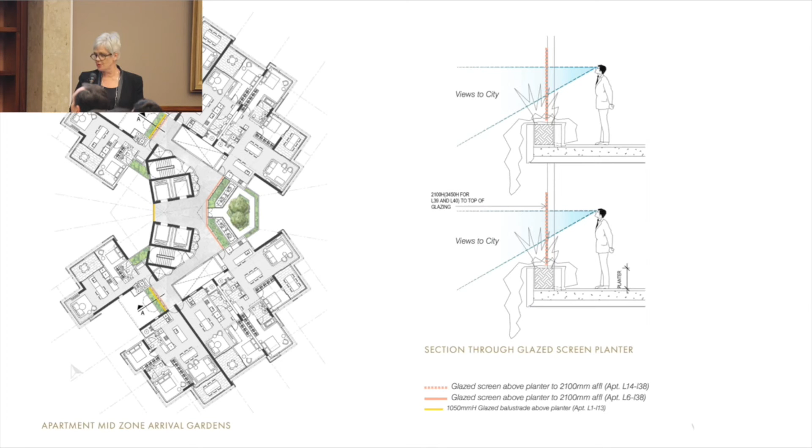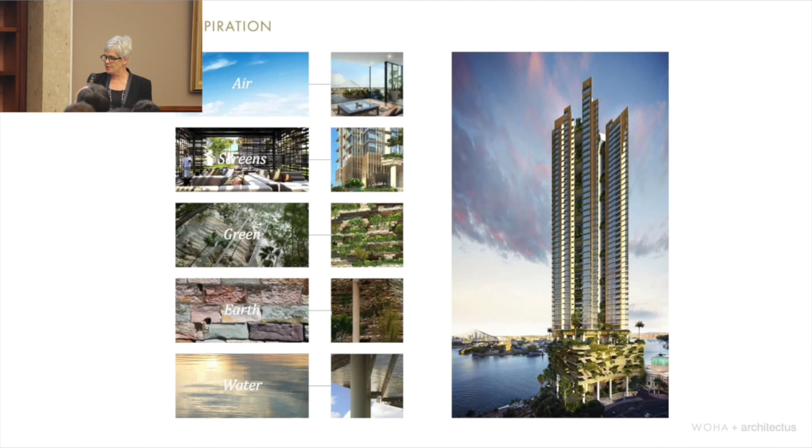So identity is an interesting one. It doesn't depend, as I said, on gratuitous shape making or layers of decoration, but it flows from a very honest, direct expression of its functional organisation, and we believe that very directly relates to how we want to live in Brisbane and the sort of architecture that precedes it. This particular project is inspired very much by its local context as well. So reducing energy and waste. It is essentially a passive, low technology, high ambience design for our climate, not a standard temperate design, which is so often replicated around here. Those are appropriate for Sydney and Melbourne and New York and other places, but not for Brisbane.

So it's interesting that the City of Sydney Energy Master Plan revealed that in standard high-rise residential, it's common for 60% of the energy use of the building to be used by common areas. So this building targets that very specifically by aiming for access to natural light and ventilation for all of those areas, and radical reduction thereby of common plant areas and services where possible. All bathrooms and kitchens have openable windows, and the apartments have these laundry areas with space to dry clothes naturally. I think that's a luxury too. So the apartments are therefore designed to function almost all year round without heating or cooling, and that's really critical. Again, a new luxury, I think, due to the sun shading, the solar access and the cross ventilation.

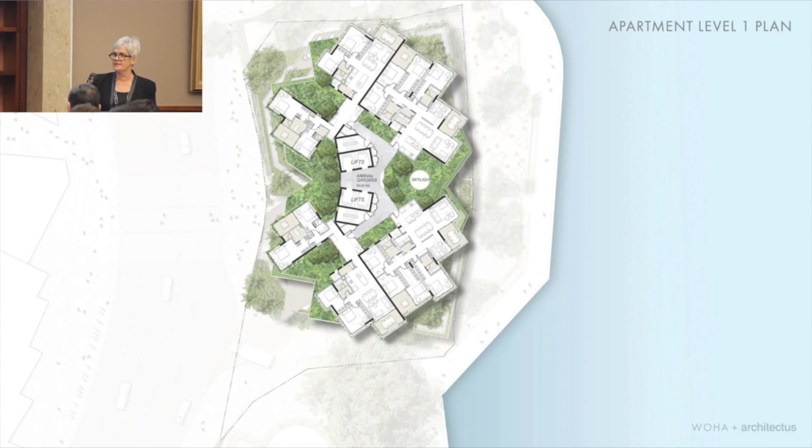They are provided with air conditioning, zoned to the apartment and controlled individually. And I think this is a really important move as well, so people are not forced to live in high energy consuming air conditioned spaces. They have the choice, which we think is really important.

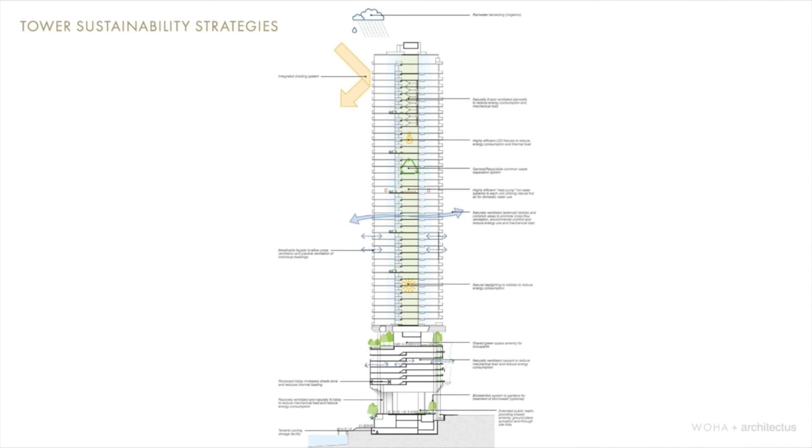And there's the section explaining the various energy moves and how the building operates. We've reached a really exciting stage in this project, and it means a great deal to have the opportunity to demonstrate these subtropical principles that we do believe in and that we're very passionate about. And we're very grateful for the passion and commitment of CBUS Property and the consultant teams working to deliver what we think is an exemplary project on an exemplary site in an exemplary city. So thank you.

The original idea was to have a bit of a panel discussion now, but our normal stage here has disappeared for some reason this week. Maybe just stand. Yeah. But having Michelle here from CBUS is a great opportunity to ask some of those key questions about how does it stack up, which would be great.

It's a fascinating building. I guess as an architect, we've looked at some of the projects of WOHA in Singapore. We look at the amazing wall-to-floor ratios and circulation and green zones. How does it stack up? Obviously, we're seeing it happening now in Brisbane, so it's certainly a bold move by CBUS, which is a great site. But any insight into what's making it really work?

That is another one of the rules: it's about finding all the freebies. And to be honest with you, we did have those as well. So there's a bit of a hint earlier in that piece where there's the standard design versus what our architect is proposing. So we asked them to test a standard design against this one very early on, so we could demonstrate some feasibility. So Libby did allude to some very key clues of how we have made it stack up.